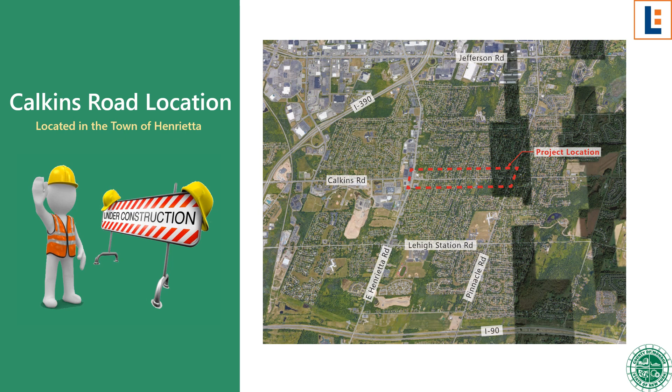The Calkins Road project is located in the town of Henrietta. On its western edge is the East Henrietta Road and Calkins Road intersection, and on its eastern edge is the Pinnacle Road and Calkins Road intersection. The total length of the corridor is approximately 1 mile.

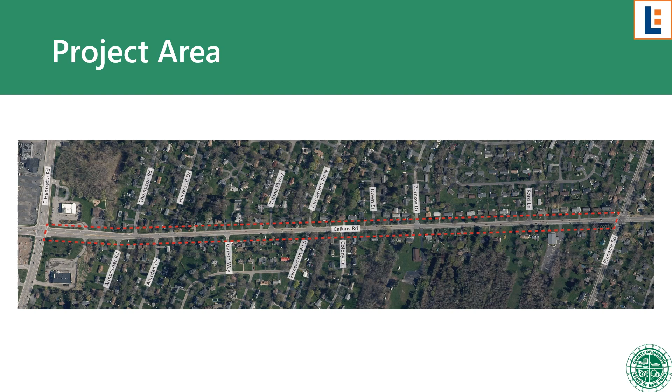As we take a look at the project area map shown here, it should be noted that on the western edge near East Henrietta Road, there are some commercial properties. However, the vast majority of this project falls within a residential area, thus making this project a critical piece in connecting the residents.

Let's take a look at the existing conditions. Here we're going to start with a typical existing roadway section, as you can see here looking east. Throughout the entire corridor, there are currently two 12-foot wide travel lanes running from east to west. On the outside of those travel lanes is a 6-foot wide paved shoulder that falls behind a 3-foot wide concrete gutter, as you can see in the image. The pavement cross slope does vary throughout, since the terrain varies. Currently, there are not any pedestrian accommodations throughout this corridor.

There are 3 separate closed drainage systems with 3 outfalls to the north side of Calkins Road that fall within the project limits. And currently there is a 61-inch by 84-inch corrugated metal pipe arch culvert just east of Bard Lane.

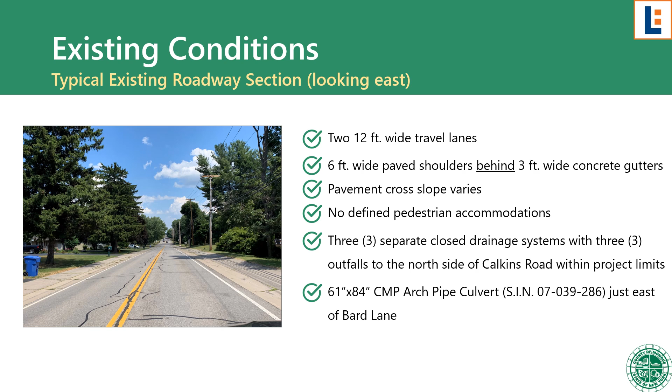Now let's take a look at the existing traffic and speed data for this portion of the Calkins Road corridor. The posted speed limit is 35 miles per hour. However, when referring to the 85th percentile speed, we see that the eastbound traffic is moving at 42 miles per hour and the westbound traffic is moving at 43 miles per hour. For clarification, the 85th percentile speed is the speed at or below which 85% of all vehicles are observed to travel under free-flowing conditions past a monitored point.

Finally, the average daily traffic according to the 2018 New York State Department of Transportation counts shows that approximately 10,012 vehicles travel through the area daily.

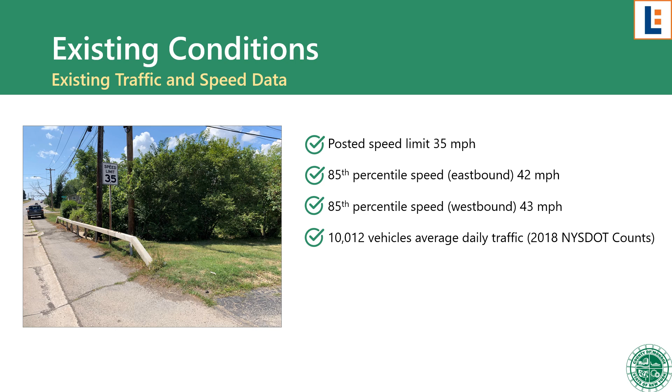Okay, now let's take a look at the existing conditions of the pavement. Maintenance history shows us that several upgrades have occurred over the decades. In 1962, a reconstruction of the entire project area from East Henrietta Road to Pinnacle Road occurred. Then in 1972, a partial reconstruction occurred, this time from East Henrietta Road to Thompson Road. In 1981, a true and level with a single course overlay and a shoulder widening was put into place behind the concrete gutters. This occurred from Thompson Road to Pinnacle Road.

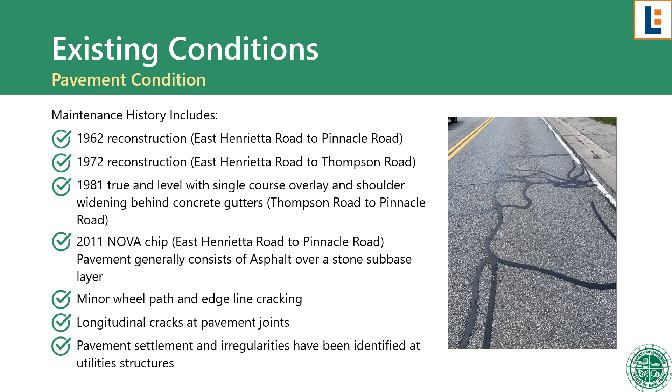And then, in 2011, a NOVA chip project, where the pavement generally consists of asphalt over a stone subbase layer, was put into place from East Henrietta Road to Pinnacle Road. For those who aren't aware, Nova chip is simply a preventative maintenance tool used to help extend the life of a road. Some of the other existing conditions today are minor wheel path and edge line cracking, longitudinal cracks at the pavement joints, and pavement settling and irregularities where there are utility structures.

Another important existing condition to take a look at is the collision history for this project area. This accident information comes from January 1st, 2018 to October 31st, 2021. During that time, 82 crashes occurred within the project area.

52 of those 82 crashes were at the East Henrietta Road signalized intersection. 9 of those 82 crashes were at the Pinnacle Road signalized intersection. 16 of the 82 crashes were at the side streets between East Henrietta Road and Pinnacle Road. 5 of the 82 crashes were at mid-block sections.

16 were not reportable crashes. 42 included property damage. 23 included injury. And there was one fatality crash at the intersection of Calkins Road and Down Street.

According to crash patterns and the clusters identified at East Henrietta Road signalized intersection, there are northbound and southbound left turn collisions, eastbound, westbound, and southbound rear end collisions, and southbound side swipe overtaking collisions.

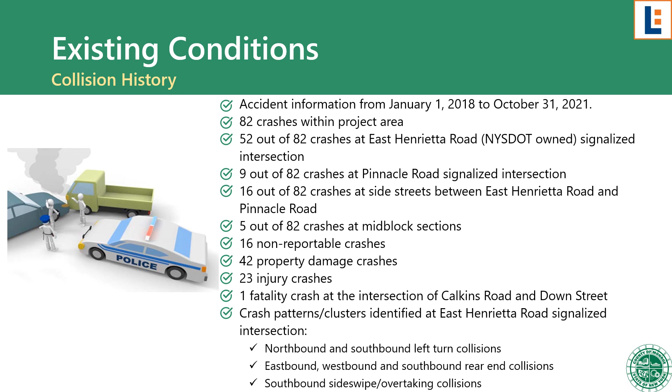This brings us to the project objectives. Why is this being done? What can the community look forward to? Well, there are 5 main points. 1. This project will correct existing pavement deficiencies. 2. It'll extend the life of the pavement structure itself.

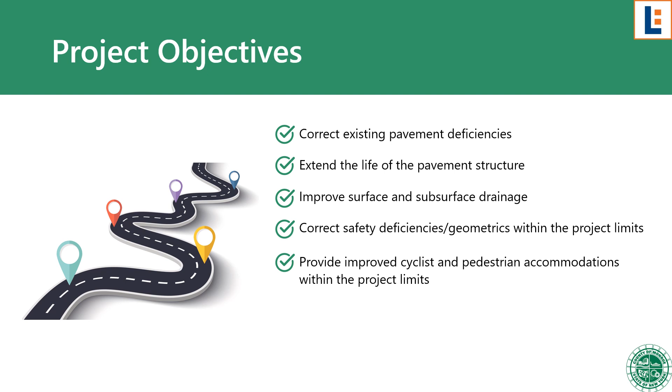3. It will improve surface and subsurface drainage. 4. It'll correct safety deficiencies and geometrics within the project limits. And 5. It'll provide improved cyclist and pedestrian accommodations within the project limits. The county and the design team have sought to come up with 2 alternatives for the proposed improvements of this project area.

Scope of work for alternative 1 includes utility relocations as necessary, replacement of the existing culvert just east of Bard Lane, the removal of an existing concrete gutter and asphalt shoulder behind the gutter, the construction of drainage improvements, the construction of pavement widening with a new curb. This will give us 14-foot wide travel lanes,

the installation of a new concrete walk on the south side of Calkins Road, the restoration of driveway aprons, the relocation of mailboxes as necessary, a mill and overlay of the existing travel lanes, and the installation of all new pavement markings and signage.

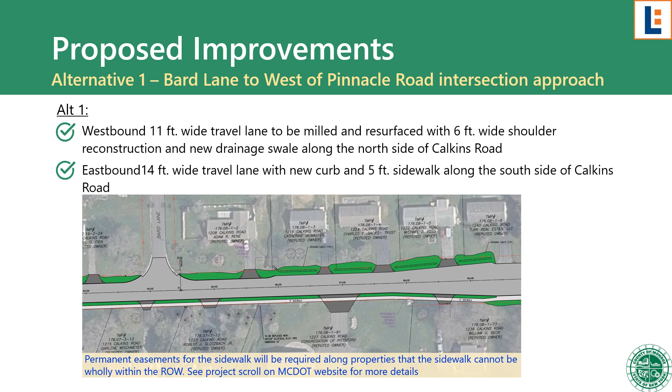Okay, let's take a look at proposed alternative number 2. You will note in this part of the presentation that there are many similarities between both alternatives, but there are some changes as well. In this case, the scope of work includes utility relocations as necessary again, the replacement of existing culvert just east of Bard Lane, the removal of existing concrete gutter and asphalt shoulder behind that gutter, the construction of drainage improvements. One area where there'll be a change is the construction of new 6-foot wide shoulders with a new curb. This will result in the final travel lane section of 10 feet wide and a 6-foot shoulder.

There will also be the installation of new concrete sidewalk on the south side of Calkins Road. There will be restoration of driveway aprons again, the relocation of mailboxes as necessary, a mill and overlay of the existing travel lanes, and the installation of all pavement markings and signage will occur once again.

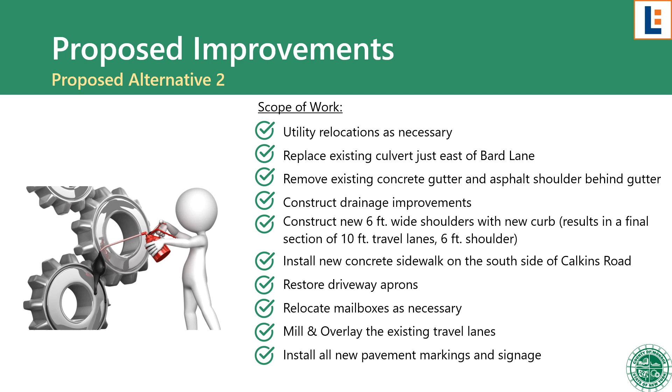All right, here is the typical section for the proposed roadway for alternative number 2. Here's where you can really see the changes and the differences. If you take a look closely at this graphic, you'll note that the travel lanes are now only 10 foot wide instead of 14 feet wide. However, there's now a 6-foot shoulder on each side that'll be reconstructed, making the entire roadway itself slightly wider than it is today.

On the north side, there'll be a 6-foot lawn area instead of a 5-foot, and a 5-foot sidewalk, just like in alternative number 1. However, the lawn area will vary in between the sidewalk and the edge of the roadway. Again, the existing grade will be matched with the project.

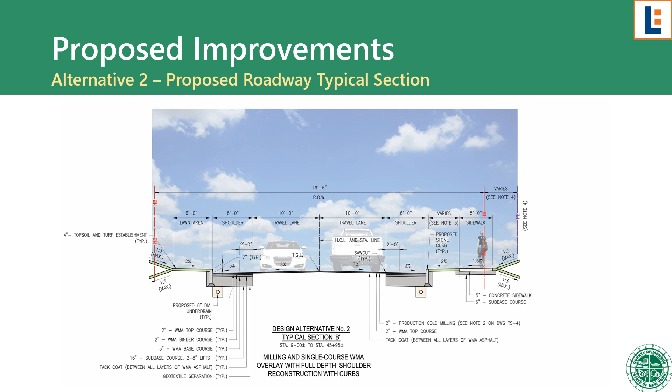Just like we did with alternative 1, we'll now take a closer look at each portion of the project for alternative number 2. This graphic represents the East Henrietta Road to Thompson Road section. Like the first alternative, we will mill and resurface the existing pavement from curb to curb. Also, there'll be a new 7-foot wide attached concrete sidewalk and a 5-foot wide detached sidewalk on the south side of Calkins Road. And we will replace the 7-foot wide attached concrete sidewalk on the north side of Calkins Road.

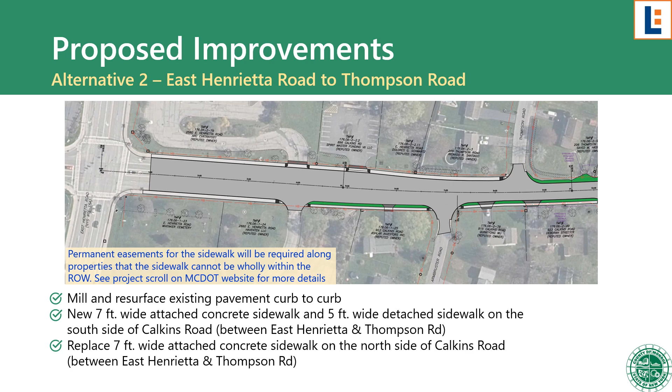Here is where we begin to see the biggest difference between alternative number 1 and number 2. This is the Thompson Road to Tulane Parkway section. We will now have 10-foot wide travel lanes milled and resurfaced, with 6-foot wide shoulders that will be reconstructed. Again, we'll have new curb and a 5-foot wide concrete sidewalk on the south side of Calkins Road.

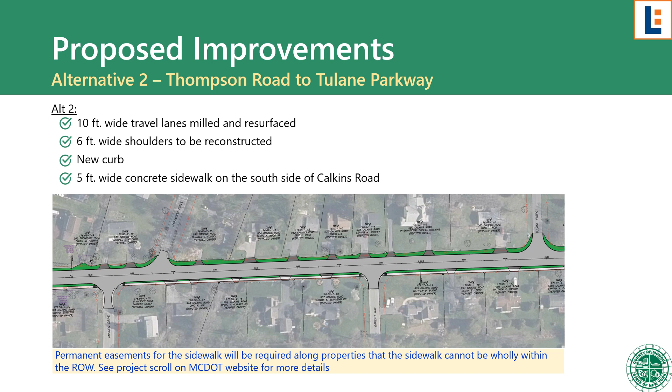For this section between Tulane Parkway to east of Down Street, we have a very similar situation that we saw in the last slide. 10-foot wide travel lanes will be milled and resurfaced. 6-foot wide shoulders will be reconstructed. There will be new curbing and a 5-foot wide concrete sidewalk on the south side of Calkins Road.

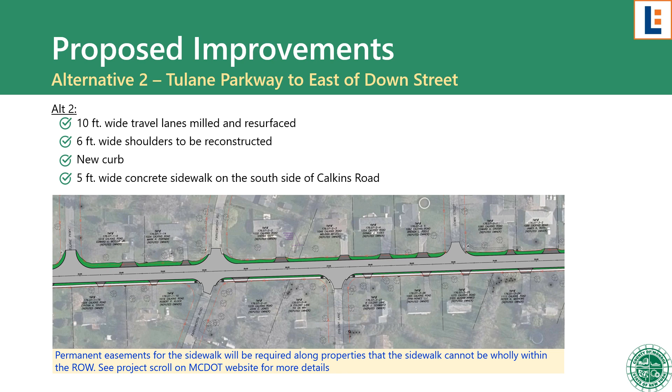For the area between Zornow Drive and Bard Lane, we continue with the same elements. 10-foot wide travel lanes milled and resurfaced, 6-foot wide shoulders to be reconstructed, new curbing, and a 5-foot wide concrete sidewalk on the south side of Calkins Road.

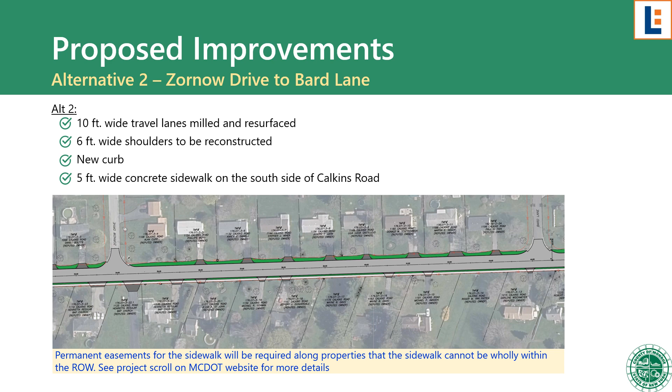Now in this portion between Bard Lane to west of the Pinnacle Road intersection, we do have some variation. The roadway continues to be 10-foot wide travel lanes to be milled and resurfaced and 6-foot wide shoulders to be reconstructed. However, on the north side of Calkins Road, we have a new drainage swale. Throughout the area, there'll still be new curbing and a 5-foot wide sidewalk along the south side of Calkins Road.

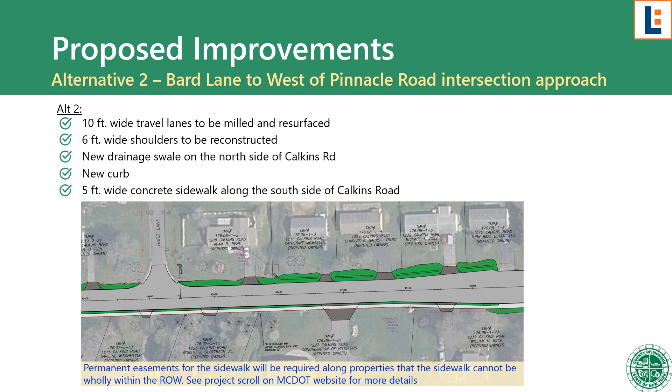And finally, as we progress to the eastern limit of the Pinnacle Road intersection area, you'll note that the milling and resurfacing will continue for all existing pavement from curb to curb. But here we also transition, just like in alternative 1, from the 5-foot wide detached sidewalk to a 7-foot wide attached concrete sidewalk on the south side of Calkins Road.

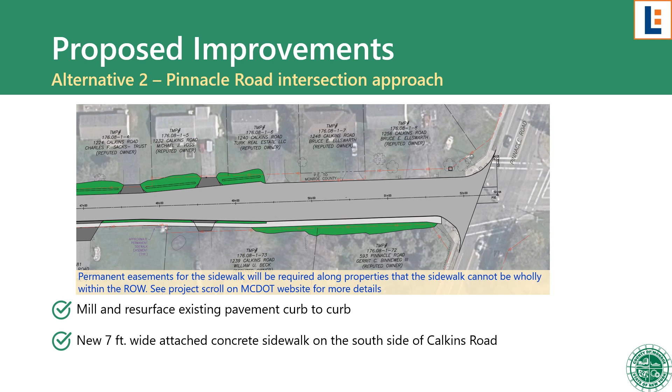All right, now that we've seen both alternatives in detail, let's do a quick summary comparison. On alternative 1, the total pavement width is 28 feet wide, with two 14-foot wide travel lanes. There'll be curbing on both sides of the road, and in select areas along the north side, there'll be stormwater management practices. While on the south side, there'll be a 5-foot wide tree lawn, or trees, and a 5-foot wide sidewalk from Thompson Road to Pinnacle Road. There may be a need for 2 to 3 easements that are required for alternative 1.

For alternative 2, the total pavement width is slightly larger at 32 feet wide, with two 10-foot wide travel lanes surrounded by 6-foot wide shoulders all the way to the curb. Again, we'll have curbing on both sides of the road and stormwater management practices in select areas on the north side. However, on the south side, the tree lawn width will vary and may not be large enough for some trees. We will again have a 5-foot wide sidewalk on the south side from Thompson Road to Pinnacle Road, and alternative 2 will require several sidewalk easements.

Please note that in both design alternatives, the final design may result in the elimination of all sidewalk easements to accommodate the installation, but we won't know that until later.

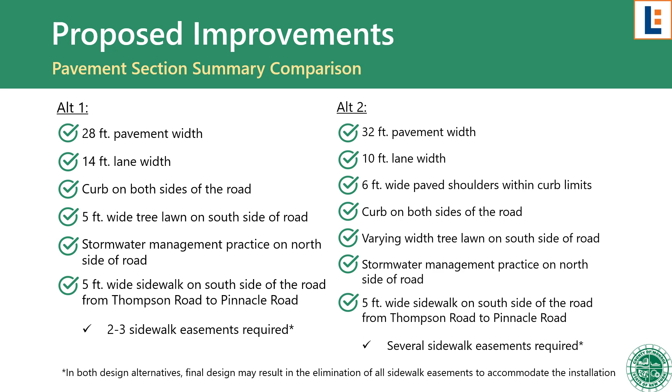One consistent proposed improvement on both alternatives is the replacement of the culvert pipe just east of Bard Lane. This existing pipe is a 61-inch by 84-inch corrugated metal culvert pipe, and it has structural deficiencies. It must be replaced. So the proposed replacement pipe is a 48-inch by 76-inch elliptical reinforced concrete pipe. The flow capacities will be maintained with this new culvert.

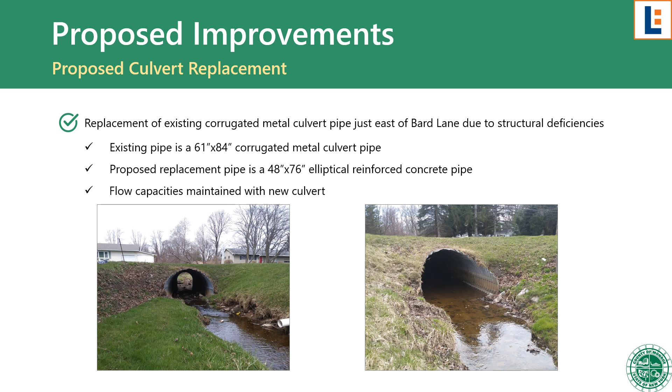One question that is often asked on these kinds of projects is, what will happen with the traffic during construction? Well, during the hours of construction, the traffic will be maintained on site via a combination of staged construction with daily lane closures to always maintain at least one-way traffic. Outside the hours of construction, one lane in each direction will be maintained. And then during the culvert replacement at Bard Lane, a temporary detour for both directions will be set up for approximately 2.4 miles in length.

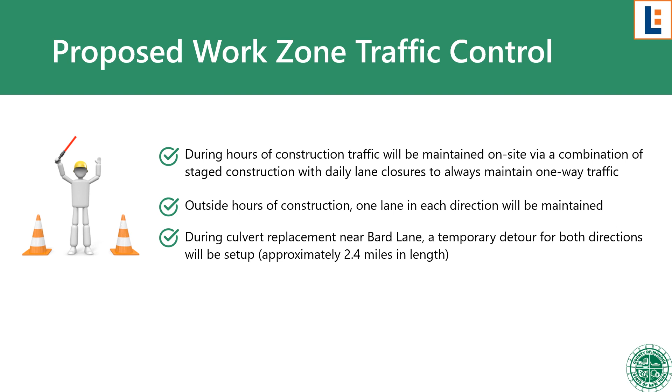It is important that everyone understands the tentative project schedule. As you'll see here, the final design public information is occurring now in December of 2022. After receiving comments, the team will continue to work in order to complete the design by August of 2023. In the fall of 2023, the project will be advertised and awarded for construction. And then construction will begin in the spring of 2024 for final completion by fall of 2024.

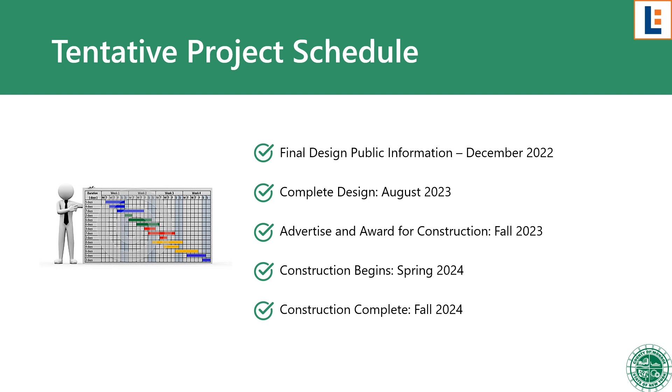You may wonder, what are the next steps? Well, field meetings with residents, if requested, are very important. These comments will be incorporated into the design, and then the final design will be completed. After it is completed, it'll then progress into the acquisition of easements and grading releases with each individual owner.

The public comment period for this project is now open. If you have any comments or questions, please reach out to Tim Harris, the project manager for Monroe County Department of Transportation. He can be reached by phone at 585-753-7747 or email at timothyharris@monroecounty.gov. Please be sure to submit your comments no later than December 22nd of 2022. There are forms noted below that you can also utilize.